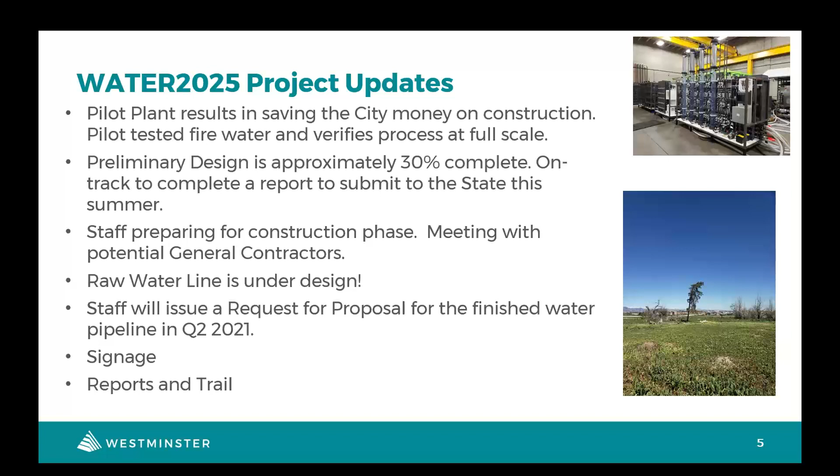And I think I got all the questions there. Just wanted to do a check-in, does anybody else have any questions about what was just discussed? Yeah, Andrew, this is Robin. Can Julie talk a little bit more about that water pipeline, kind of generally from where to where? Do you know that yet, or? Sure.

There's two sets of pipe. There's the raw water pipeline that will feed the raw water, and right now we're considering the alignment. Think about where Stanley Lake is, and understand that the city has raw water pipelines that generally follow Big Dry Creek. They come through a park on the west side of Wadsworth Parkway - the name just went out of my head - and it comes right along 92nd Avenue for a while, then drops down to the existing Semper. The goal is to tie in and use as much of those existing pipes as we can.

So we're considering - there's three or four different routes. Some of them go through existing roads like Old Wadsworth Boulevard and kind of up and over, meaning south to north and then moving east. Other routes come farther east, closer to where Pierce is right now, and then they wind their way through. Some of them cut through undeveloped areas, some of the routes cut through open space, and some of the routes come just straight all the way to 92nd and then up Westminster Boulevard.

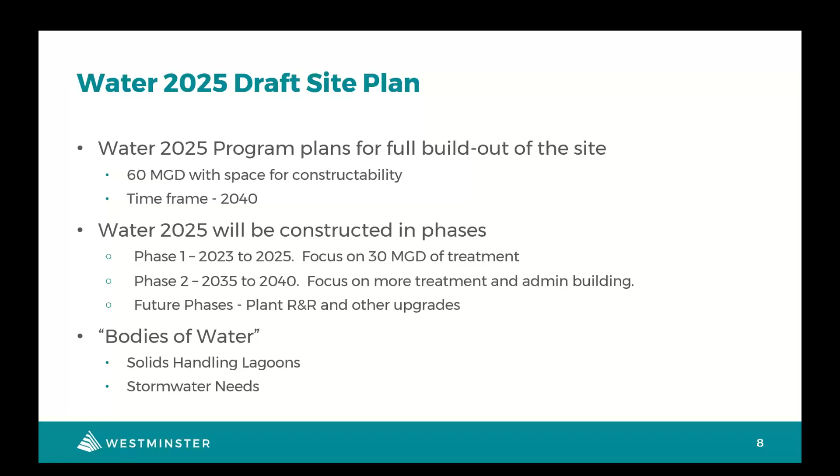We intend to demonstrate on every site plan how we are going to use our 40 acres of space. This site plan shows a campus-style water treatment facility. Semper is campus style, with one main admin building and other outbuildings like the lab, compared to Northwest, which is more like a single building. When it comes to being a good neighbor and fully occupying a site, a campus is more in line with what we think a good neighbor would want, compared to a big monolithic building.

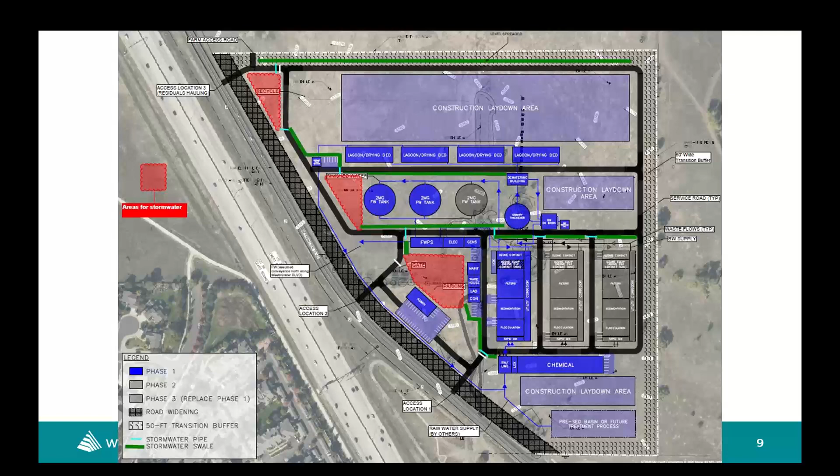It's the main processes: flocculation, sedimentation, filtration, and they form this rectangle. This is 30 million gallons worth. You'll see right to the right, it's a future phase, another 30, and then farther east, it's the final 30 that we need for constructability.

30 million gallons per day comes with other things that make it successful, like chemical storage and pumping. We need those chemicals to treat the water. After that, we also need electrical service and different equipment to support the main treatment.

When we're letting go of the admin building, we need a control room for the operators to sit in, to monitor what's going on, and a small laboratory to help them do daily checks for water quality and equipment performance.

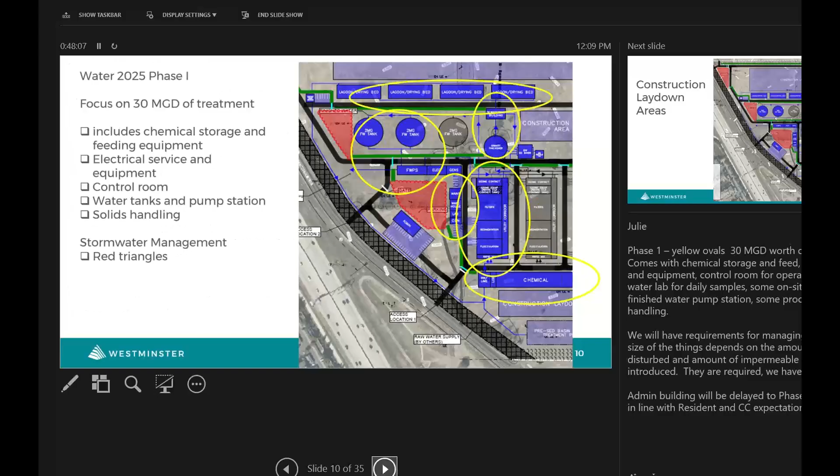The last aspect I wanted to talk about and acknowledge was the construction laydown areas in this lighter purple, the lavender color. During construction, I'm not going to lie, it's going to be a yard sale, that big on the north. Anywhere you could have materials, you could have sand, you could have pipe, you could have equipment, you could have vehicles.

Those laydown sites are important to the functionality of the construction. A good laydown helps construction proceed more efficiently. That saves the city money. Having all of our construction within our site saves the city money so that we don't have to go get temporary construction easement from outlying properties.

I'm going to acknowledge here that in some of our site plans, the lagoons that are shown at the top, near the top of the page, sometimes they're shown north to south and not east to west. That affects what happens after construction. But I want to acknowledge, it's an indicator that we just don't know yet about the solids, and some of these draft site plan elements are still moving around a little bit.

But this site plan is a huge milestone. And so I'm happy to share that with you today. And Andrew, why don't you start with the questions?

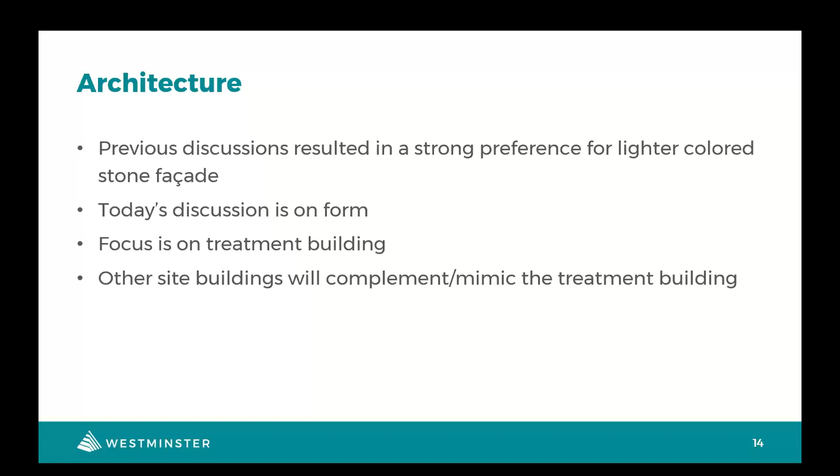For this design strategy, we focused on the campus style, as that's one of the ones that expands on the site and creates less of a yard sale kind of effect. I just wanted you to make a mental note in relationship between the three structures that I talked about moving forward. So we can go to the next slide.

And sorry to interject here, just so these concepts don't include any facade. So it's really just all about structure and form. Just want to make that point. Correct.

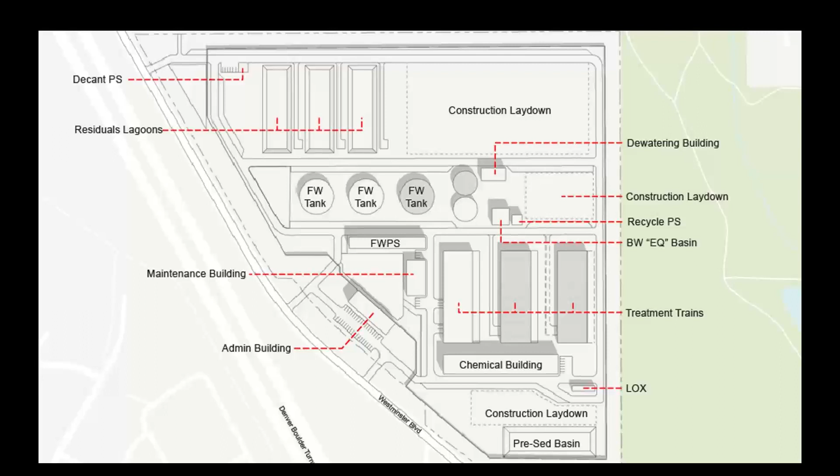So looking at the massing form for these studies, we really wanted to focus on the roof types for the massing studies, as these have a strong visual impact on the shape of the building. And when I say massing studies, I'm talking about the general shape, the form, and the size of the buildings in relationship to each other, as well as the site.

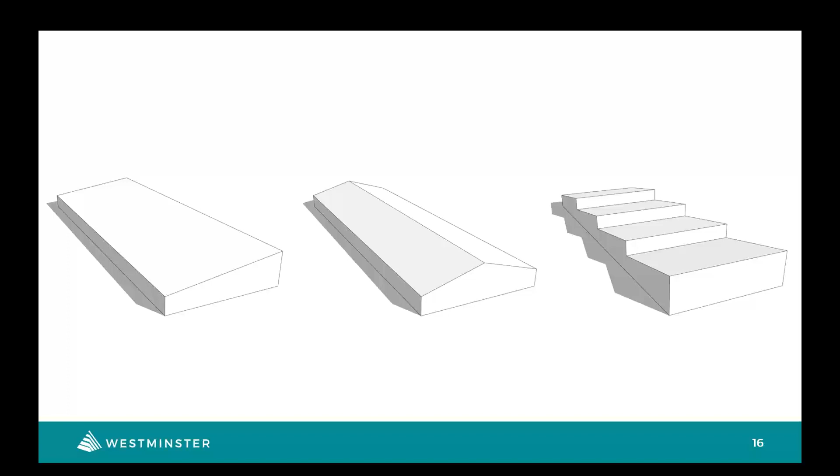You can go to the next slide. Sorry, no worries, working on it. So I guess I can continue.

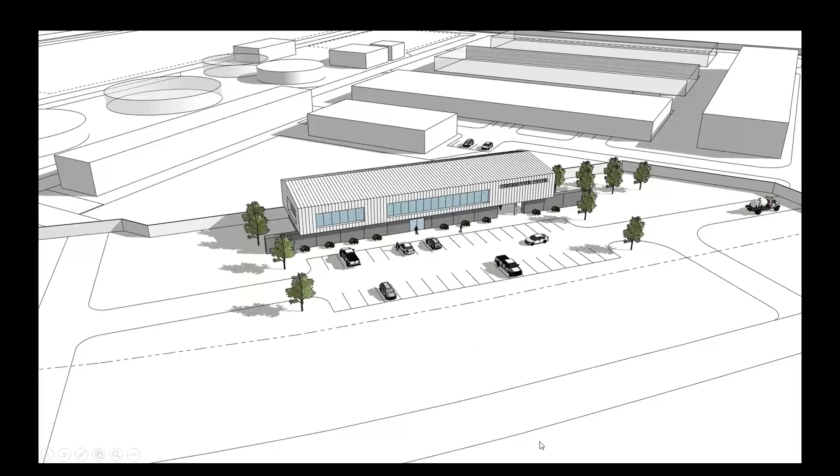The design strategy we used for this building was to create a datum line, which is basically a line across the building that separates the lower and upper floors of the building. This is used to create a strategy that anchors all the structures on the site and creates a cohesive design language across the buildings on the plant.

In these views, we chose not to focus on materiality or color. We really wanted to focus on the form and the shape of the building and structures. As the design progresses, we will begin to study materiality based on your opinions and introduce color as well. So for the purposes of these studies, we really only used white and gray colors to help differentiate different materialities that we would begin to explore moving forward.

In this view, you can clearly see the differentiation between the lower and upper floors. And if you look to the right side of the building, you can see we created this covered outdoor space that can be used as a gathering location for when tours or schools come to learn about the water treatment plant, as well as a breakout space for the building to allow an indoor-outdoor experience when the weather permits, of course.

And I'll interject here too, Hassan, if you don't mind. I'd also like to reiterate what Hassan was saying about the design approach, which is we tried to create a modern building that wasn't too crazy and kind of understood that we have some budget constraints, so we tried to do something that was simple and yet kind of unique along Westminster Boulevard.

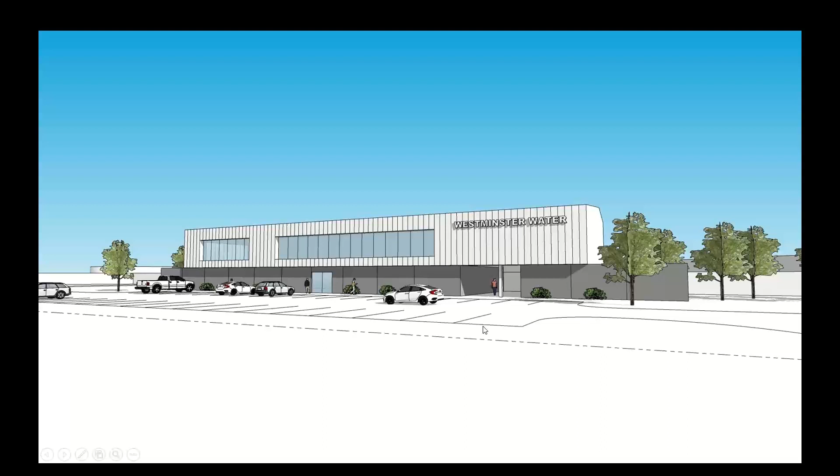You can go to the next slide.

This is more of a close-up of what exactly would be included in phase 1. To the left would be the maintenance facility with the lab and control room that would be the minimum required to run this treatment train or treatment facility. And then to the right would be the chemical storage facility, which would house all the chemicals that would then be used to treat the water.

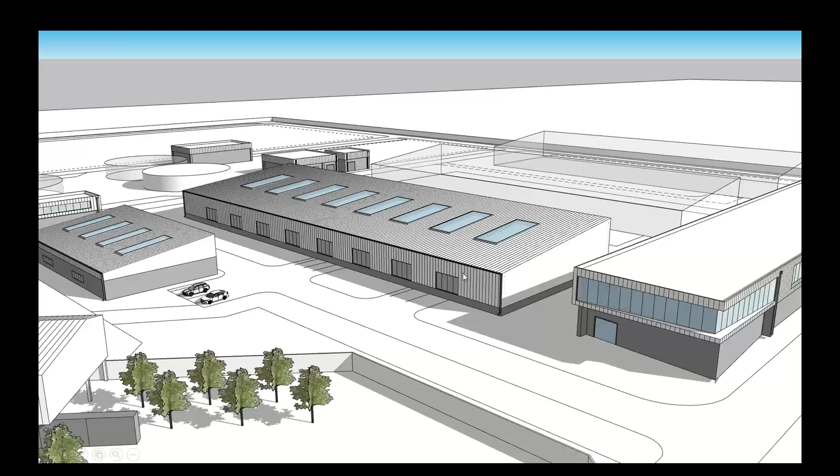And the transparent structures in the back, those are future phases. Just so you can see that the build out will extend to the full width of the site, but right now they're just future phases. Correct.

Again, another close-up view so you can get the overall, what would be included in phase 1, as well as the future treatment grayed out in the back. And I'll talk a little bit about this too. There was a panelist that was asking about the height of the buildings. And one thing that's interesting is the site slopes from the south toward the north.

And Tim Reinders and the process mechanical engineers have developed this treatment module. So most of it's buried. Most of the treatment module is underground. And this dark gray band on the bottom of the building, that represents the actual treatment module. They're actually concrete tanks that are subterranean.